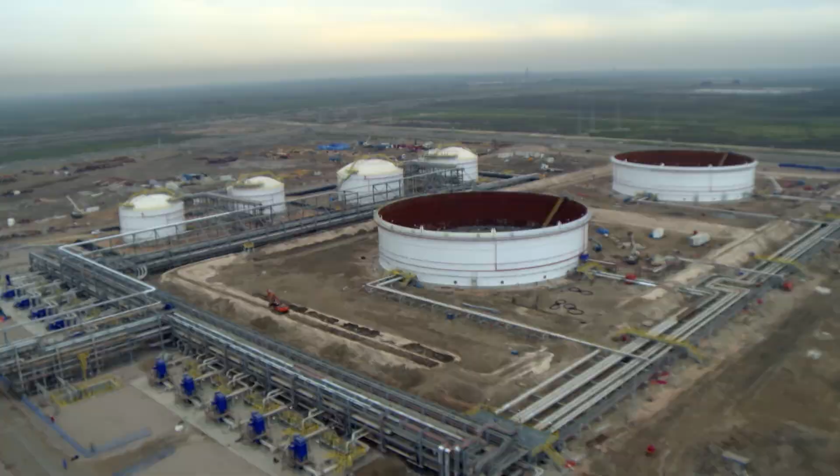Plan to start pumping oil at their mega field in Iraq in 16 weeks' time. An enormous amount still needs to be done. The export pipeline needs to cross the Euphrates.

This is absolutely not safe.

Enough wells need to be finished to produce 120,000 barrels per day. Every facility on the oil field needs to be tested, and oil needs to be brought onto the central processing facility for the first time.

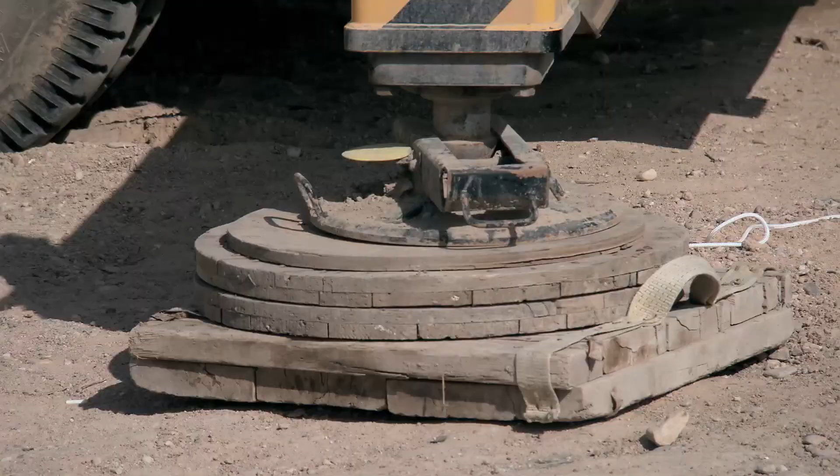But a perfect storm of strikes, religious upheaval, and engineering disasters threaten to derail the entire project.

Hidden deep below Iraq is one of the world's largest remaining onshore oil fields, West Qurna 2. One Russian oil man has dreamt about developing this field for 20 years.

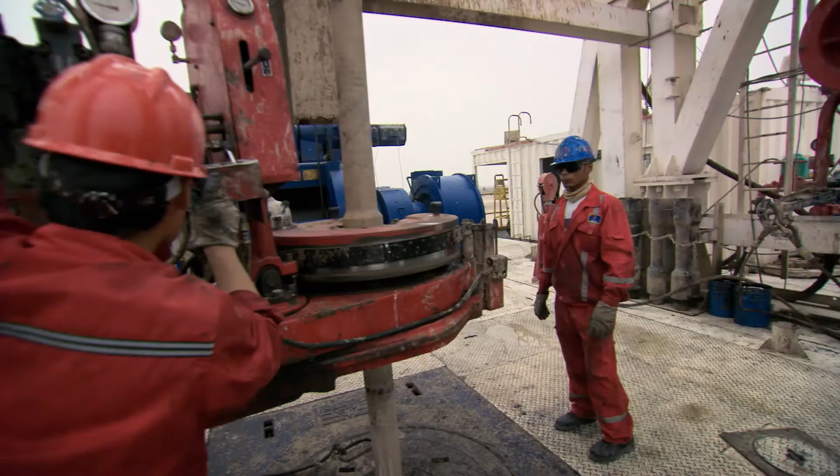Extracting this oil is the greatest challenge ever faced by oil field workers.

They battle extreme weather, searing heat, howling winds, and flash floods. They operate in a region where intimidation, violence, and terrorism are a constant threat.

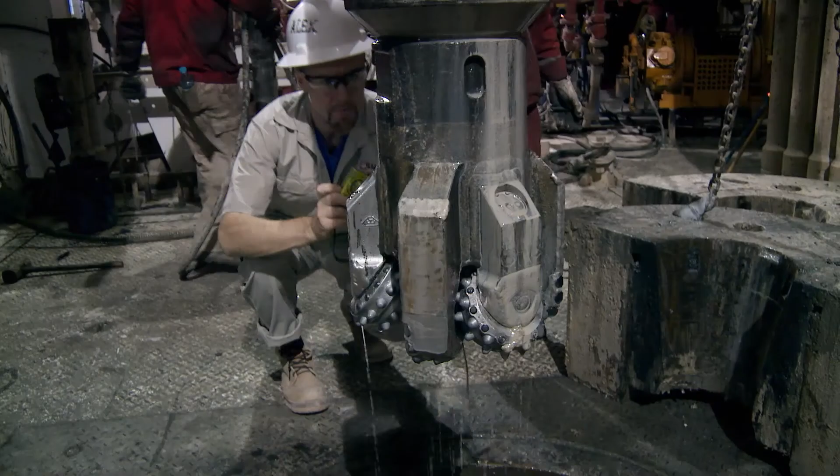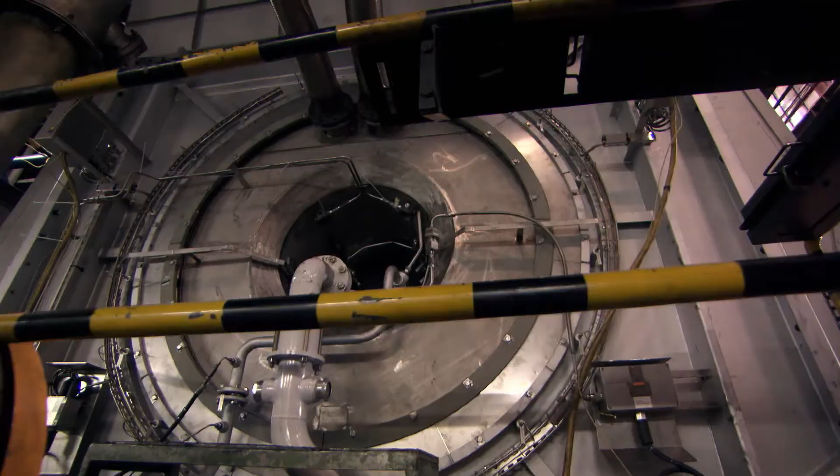But the greatest challenge of all is time. They have to lay hundreds of kilometers of pipelines, build a processing facility, tank farm and power station, and drill 23 wells, all within a construction window of 14 months.

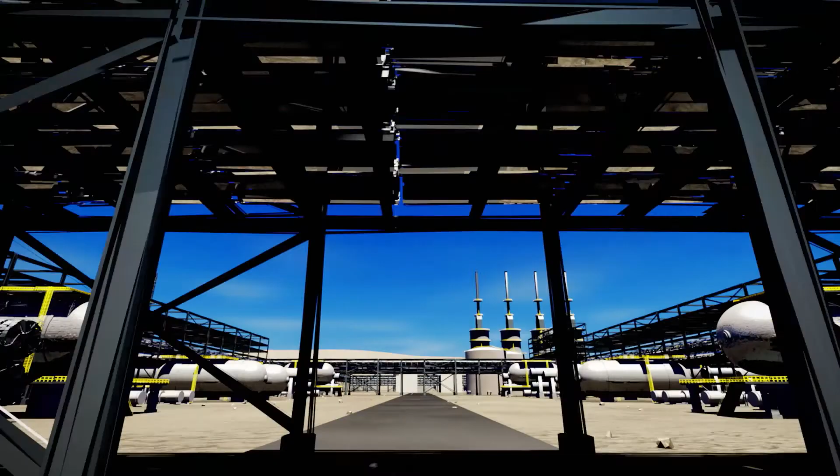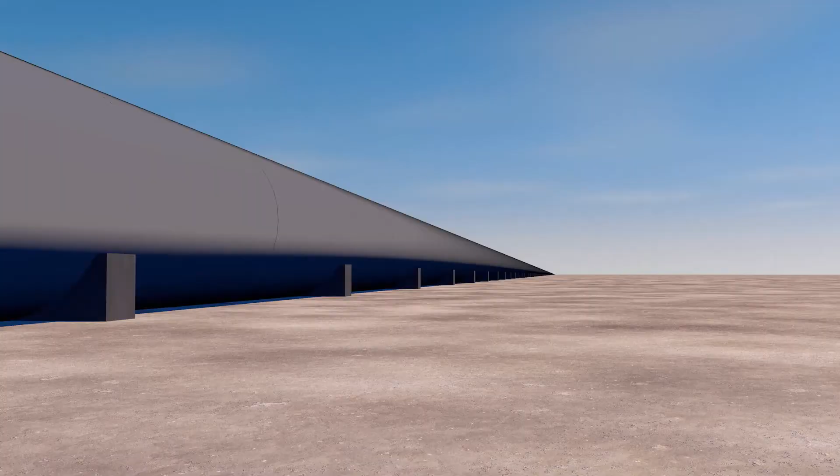By the end of March, Lukoil need to complete a central processing facility that will remove impurities from the oil, a gas turbine power plant to provide electricity for the entire project, a 103-kilometer-long export pipeline, a tank farm to hold the oil. Drilling clusters need to be built, 23 oil wells drilled, and infrastructure constructed to pump the oil to the central processing facility.

From November to January, Lukoil struggled to get their export pipeline under the 1.2-kilometer-wide Third River. However, while the pipeline team were busy completing the crossing, sectarian tensions across the region boiled over and threatened the entire project. It's the 4th of November 2013, and there's 145 days to first oil.

A nationwide religious festival marked by a day of fasting and pilgrimages to the holy city of Karbala are underway. Most of those people are coming from Basra, and they spent 3 days walking from Basra to here. Afterwards they will walk also at least 10 days to arrive to Karbala. It's about 560 kilometers.

This event is not affecting the oil operations. Those people are not harmful. They are very peaceful people.

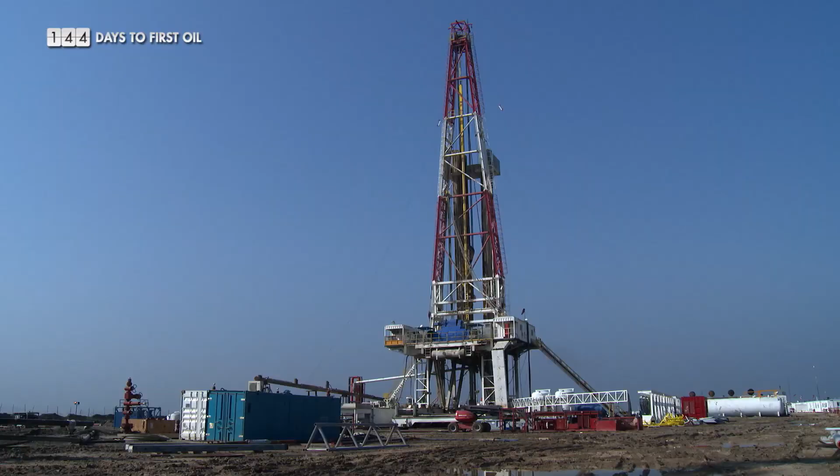Baker Hughes stunned Lukoil by deciding to pull out of Iraq completely. 600 employees of Baker Hughes and another US oil field service company called Schlumberger are moved out of the country. Drilling on oil fields across southern Iraq comes to an immediate halt.

The most important thing for our project is to keep this well safe. I mean safe for assets, for people, for environment, okay, and to be sure the well is controlled, all the well is controlled.

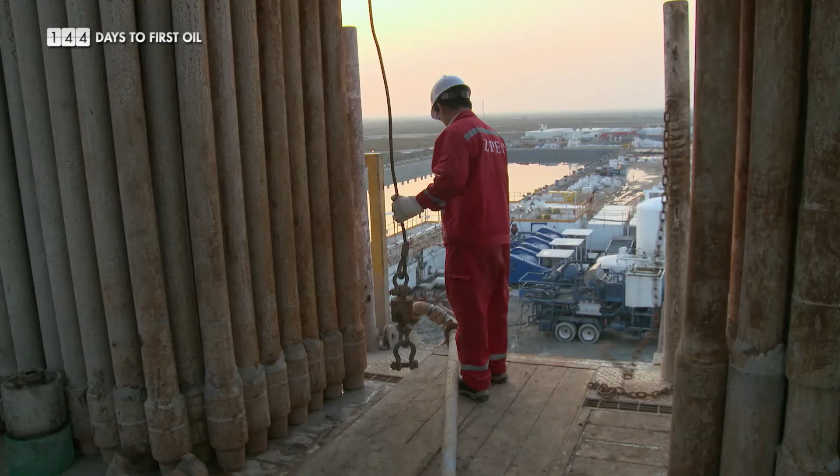If the solution is not found fast, this stoppage will prove disastrous. Lukoil won't have the 23 completed wells required for first oil.

It's 7 days since Baker Hughes left Iraq. The drilling clusters remain at a standstill. A delegation led by the Director General of the Southern Oil Company arrives at the pilot camp. Iskander Nazirov requests an increase in the number of troops protecting the oil field.

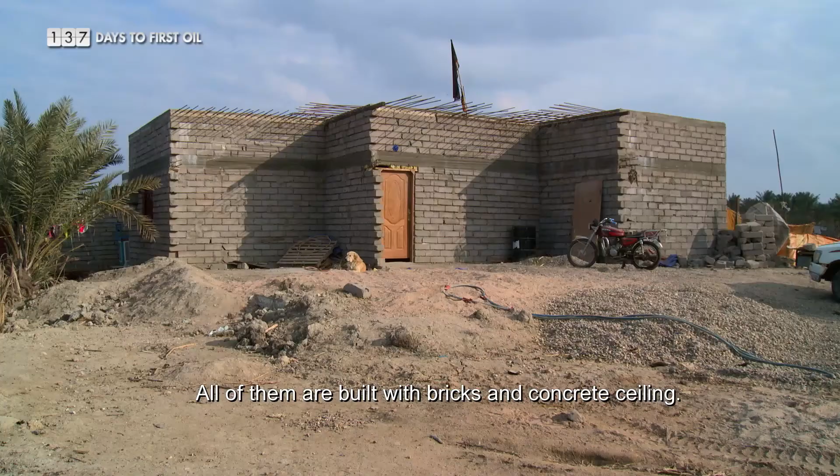When the oil companies want to use their land for oil activities, the Iraqi government paid them a lot of compensation.

Most of them, especially the young guys, are now working in the companies. Some of them work in the OPF as oil police in the company. Some of them work in security companies as security guards. Other people are working as normal workers. In fact, this area is giving them more sources to support their life.

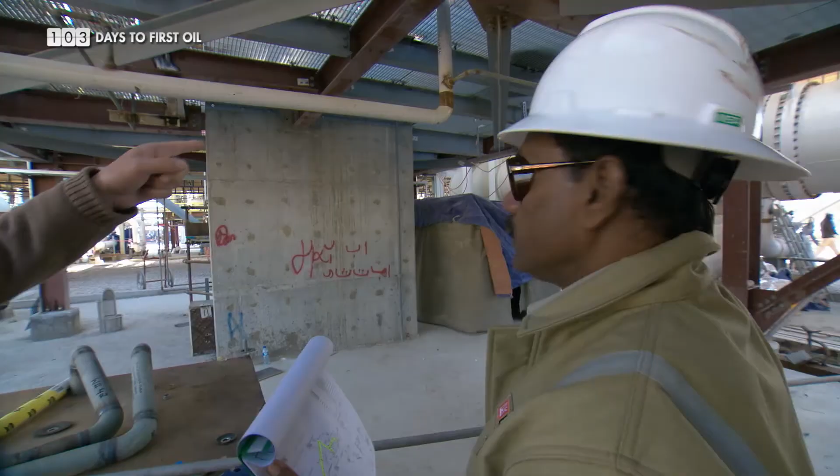All the pipework at the central processing facility required for first oil is now complete. Piping supervisor Gary Smith is here to carry out one final inspection. We're looking for any faults or anything that's not as per design or specification.

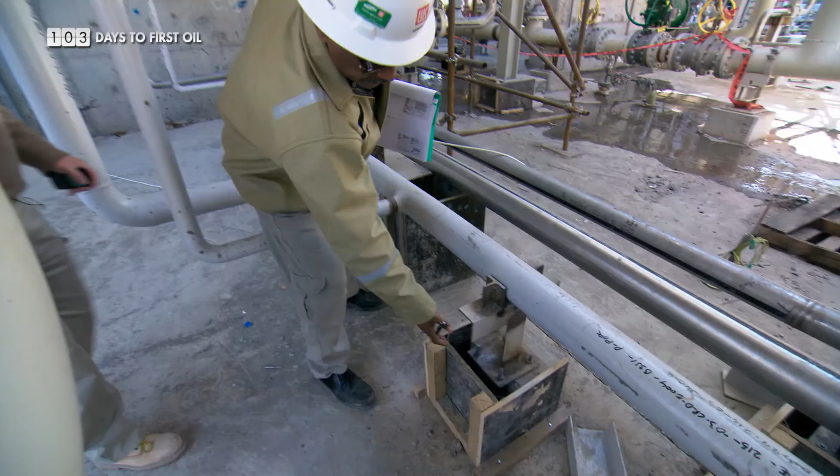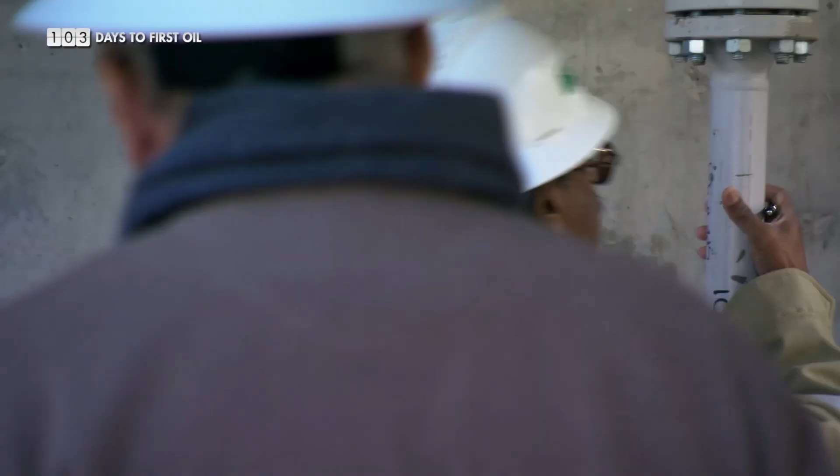Faults are marked down as either A or B, depending on their severity. If you have welded points that are not done, that becomes an A item, meaning this is on hold until the A item has actually been done. Fortunately, all the faults Gary has discovered are B classifications.

These can be rectified after the testing. The painting might not be up to standard. The support might need grouting or perhaps have the plinth finished off. But it's basically something that's not part of the integrity of the pipework. This is very good news.

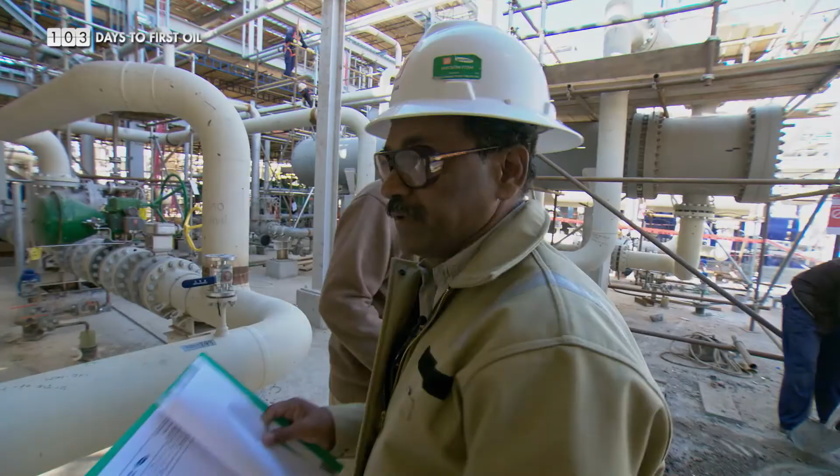The CPF is finally ready for pre-commissioning and commissioning, a period of intense testing of every facility on the oil field.

Now that the oil ministry has increased security for the oil field, Baker Hughes are back. For the past week, the drillers have been working at full capacity in order to catch up.

At Cluster 8, Mahmoud's crew are back on track. We finished all the wells, which were suspended for more than 2 weeks, successfully without any problems. And we continue our normal operation with Baker Hughes from that time up until now without any interruption.

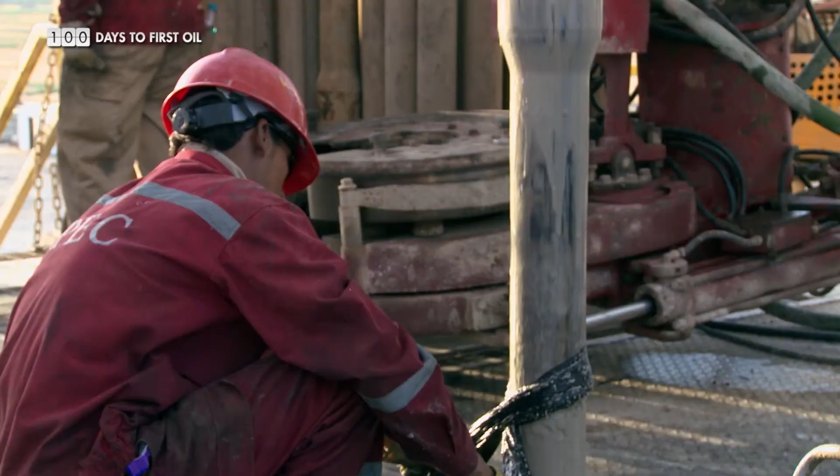23 oil wells were planned for first oil, but Baker Hughes' absence has had a profound impact. Now only 18 wells will be ready. No one will know whether 18 wells will be enough to supply the 120,000 barrels a day required for first oil until the oil begins to flow from the clusters to the central processing facility.

The drilling of a 1.5-kilometer borehole under the Euphrates River started in April 2013. It should have been completed by June 2013. It's now December, and once again the borehole has collapsed.

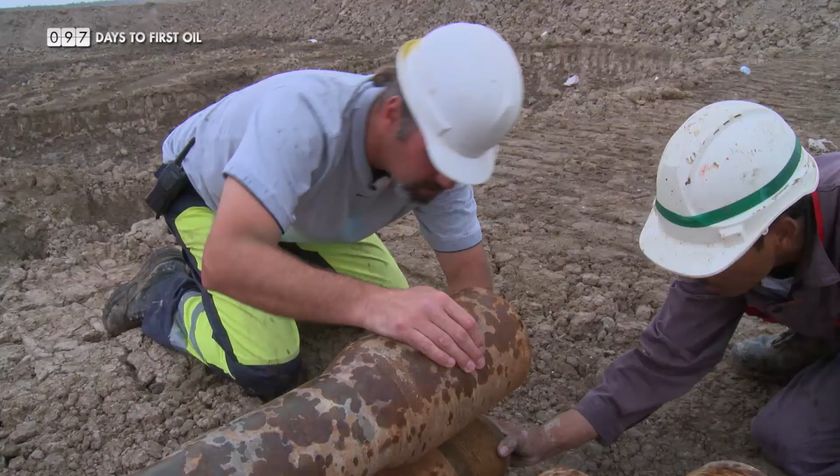The drillers suffered from appalling weather, rusty pipes, badly mixed mud, and faulty drilling rigs. In the driller's cabin, Supervisor Patrick Rogan is becoming increasingly frustrated.

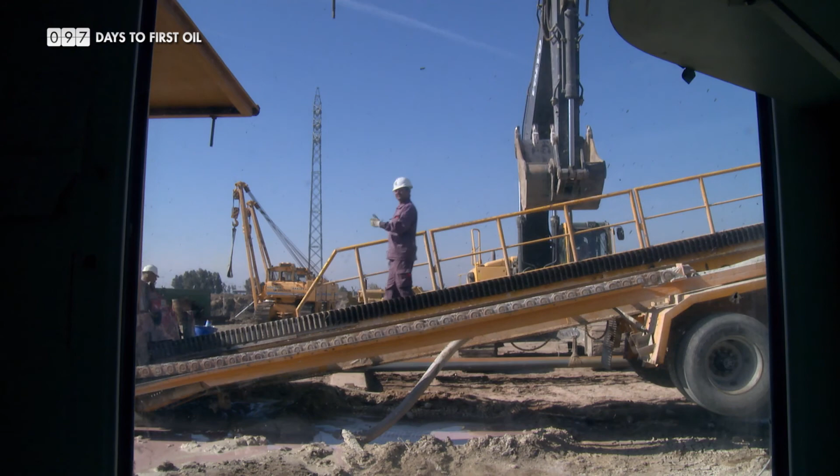There's been a lot of inexperienced guys on here. You try to explain, and explain, and explain, but nothing seems to sink in. This stop-start is really affecting the borehole. It's not doing us any favours whatsoever.

He reads the riot act to Techno's chief driller. If you want to pull that through, you've got to be in that seat at 6 o'clock in the morning, and drillers sitting there at 6 o'clock at night when that's still hot. No stopping. If they can go from A to B with no stoppages, working 12 hours a day, not stopping for stupid mistakes like running out of diesel, you'll have a chance of getting this pipe in.

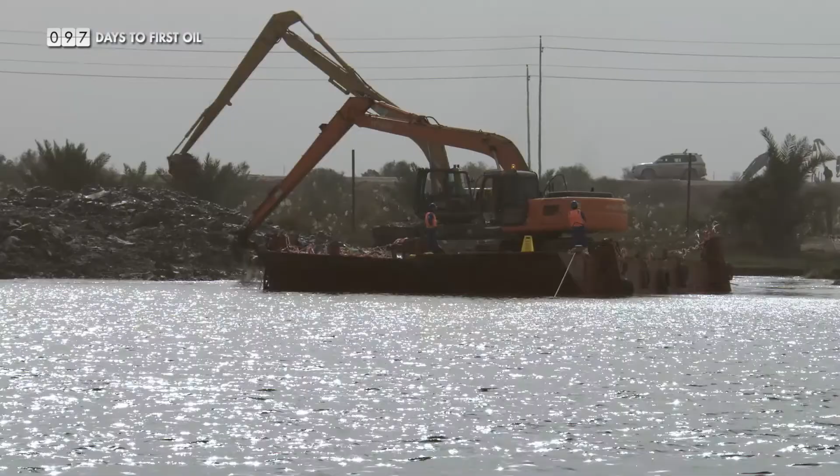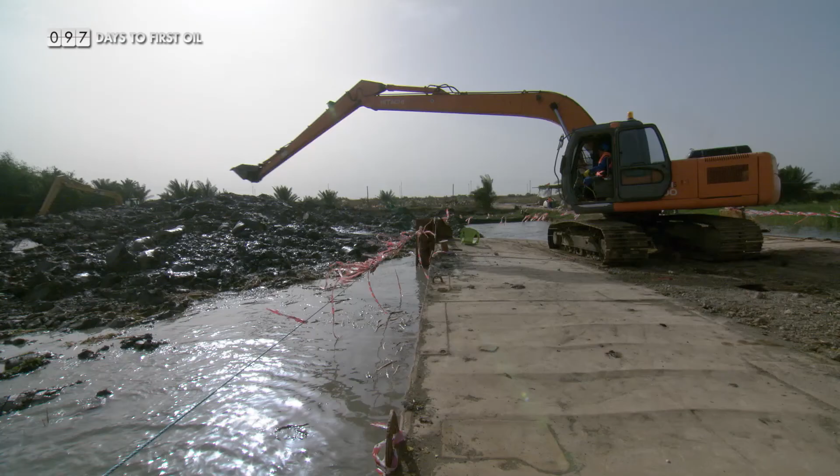One way or another, the guys have to get the pipe across the river in the next month if Lukoil are to have any chance of completing first oil by March the 29th. For the past few months, Lukoil's management have been preparing an alternative method of crossing the Euphrates, known as open cut. An Iraqi contractor has already dug a 4-meter deep trench along the riverbed. The open cut should be a simpler and quicker operation than drilling a borehole under the river. This operation might just allow Lukoil to complete the pipeline on schedule.

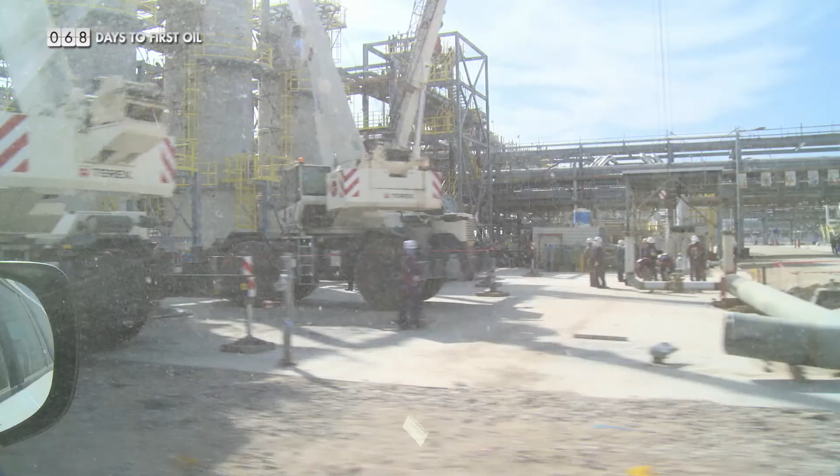At the central processing facility, the commissioning process is almost complete. Deputy Project Manager Vitaly Dyakov arrives to perform the final checks before the launch of the facility. New plant, new facilities, all people is new, and of course everybody is worried and a little bit nervous, but it is a normal process. If people don't worry about that, this could be dangerous.

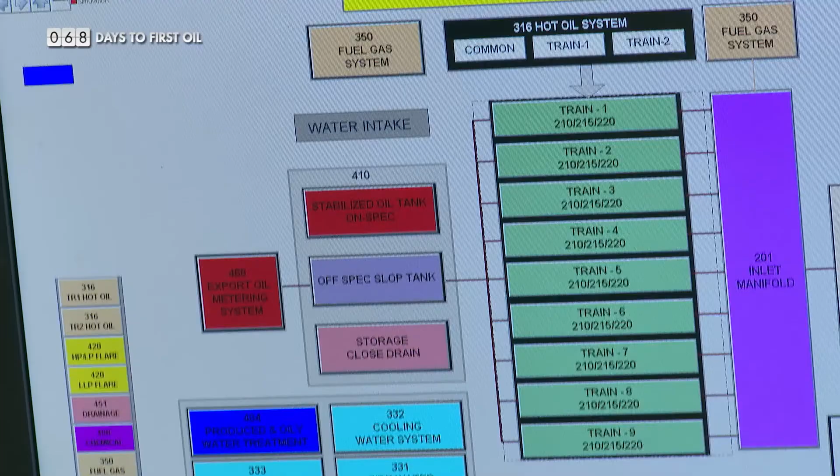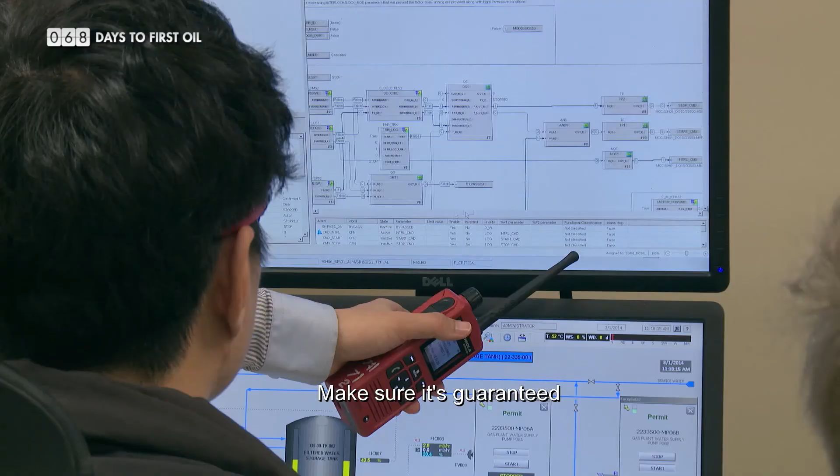First, he inspects the oil heaters and water treatment plant. Then he heads to the CPF's control room, the hub of the site, where all the processes to remove impurities from the oil are monitored. All is done, the cause and effect diagram, everything is checked. Train 1 is complete as well, yes? Yes. It's from here that the cleansed oil is dispatched from the CPF to the Tuba tank farm. Now we do a final test of the whole process without oil, to make sure and guarantee that during the startup all systems - gas detection, fire alarm, emergency shutdown - are working properly according to the approved design, and then we get oil.

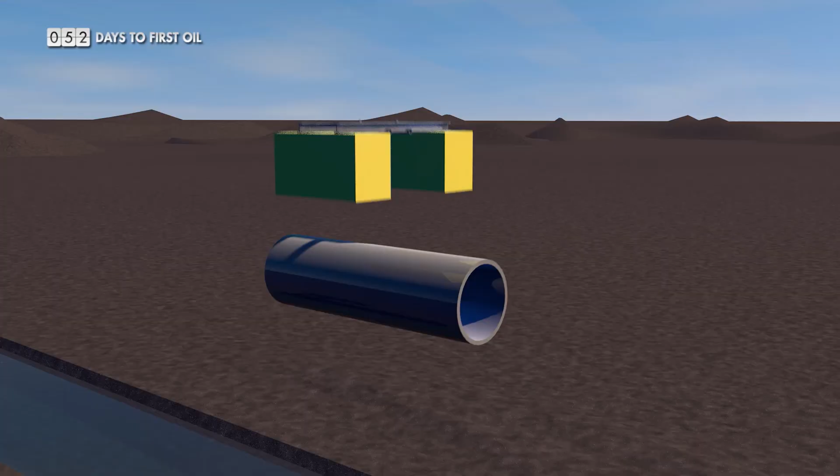The trench has been dug, the pipeline has been successfully welded together, and floats are now being attached along its length. This one section will complete the 103-kilometer export pipeline. The 500-ton pipeline will be lifted by cranes section by section. When it's safely floating in the trench, it will then be pulled across the river. Once in the correct position, the floats will be cut away and the pipeline will sink into the trench.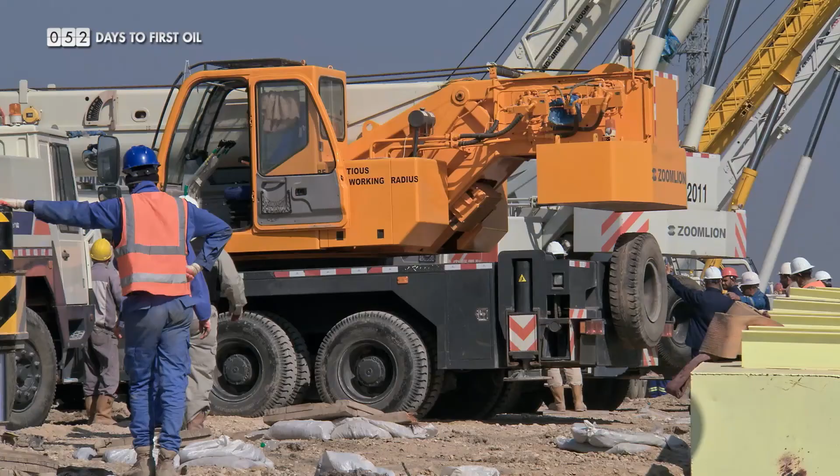The 9 50-ton cranes arrive that will lift the pipeline into the trench. The guys are worried. The pipeline itself weighs 500 tons, but it'll be filled with another 200 tons of water. Our concern is the soil itself - it's not that strong, it might not be strong enough. So we are worried now because after all that weight, some collapse might happen.

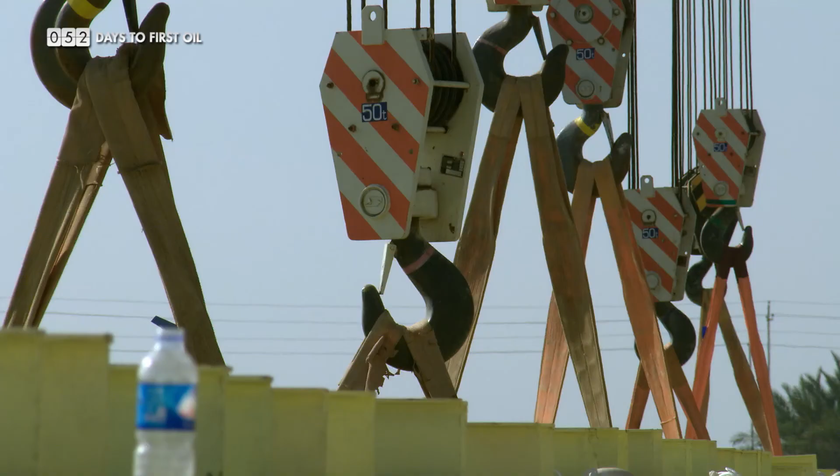The cranes are in position, but there's another problem. The company supplying the cranes has failed to provide an expert coordinator.

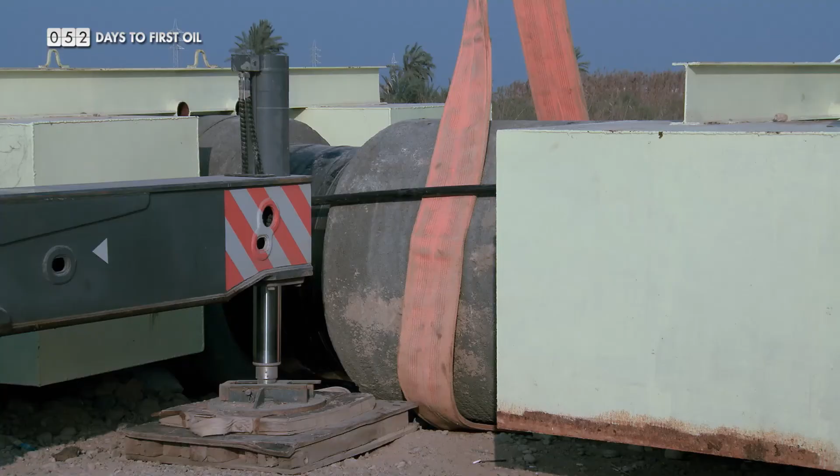Drilling supervisor Mahmoud Hussein is forced to step in and orchestrate the 9 cranes in maneuvering the 500-ton pipeline into the trench.

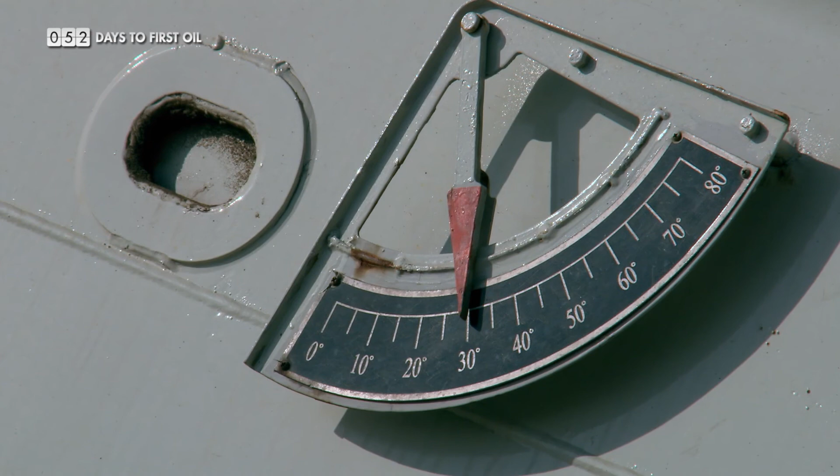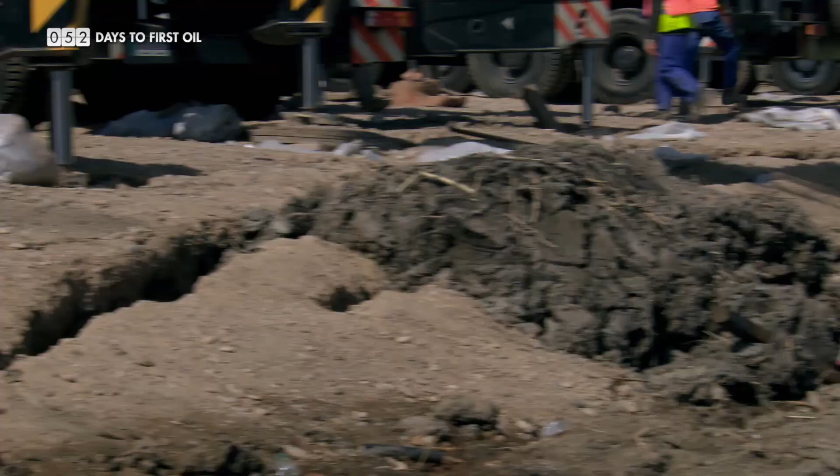The cranes strain under the enormous weight, and the pipeline is pushing against the riverbank, threatening its stability. The pipeline section hits the edge of the trench, creating huge cracks along the bank. This is incredibly dangerous - if the banks collapse now, the project will be put back by weeks. Workers rush to try to support the legs of the cranes as the rest of the team attempt to lift the pipeline up and away from the riverbank.

If he will lift just like this, it will go. What can I do? The weight is here now. If he will lift it like this, it will go.

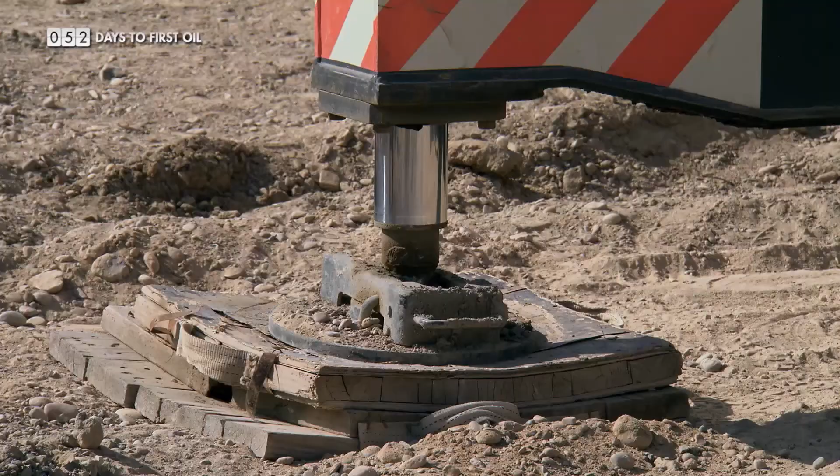Hussein must guide the pipeline into the trench before the banks collapse completely.

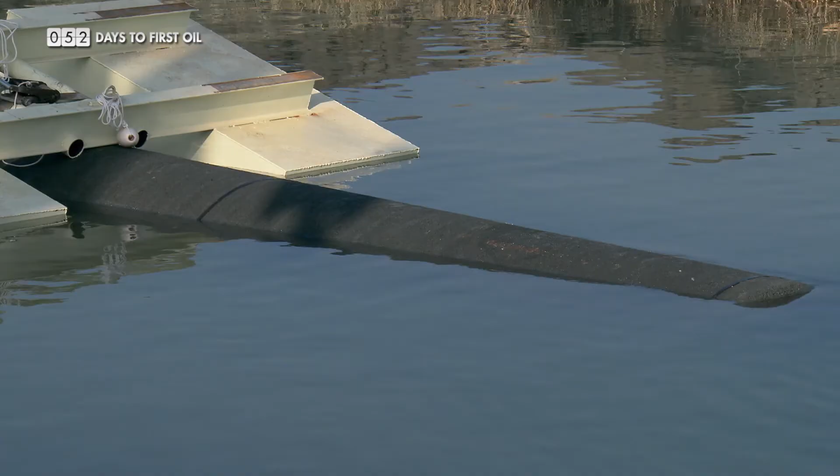The first section of the pipeline is safely in the water, but there's yet another problem. The floats have started to come away from the pipeline. If too many detach themselves, the pipeline will sink.

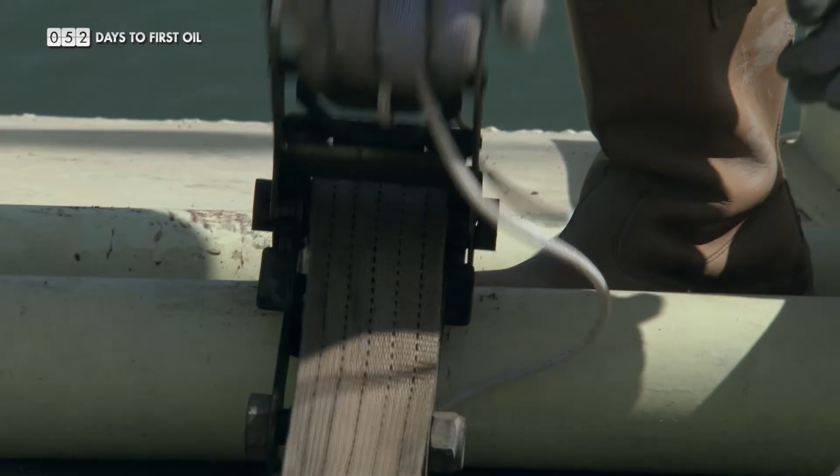As the sun sets on the Euphrates, the team know that tomorrow will be the make or break day for the entire pipeline project. Progress is not good for today. It's already almost evening here, and we get about 20-25%. It's too slow. This is the huge problem for our progress for all the project. All the oil field is here now.

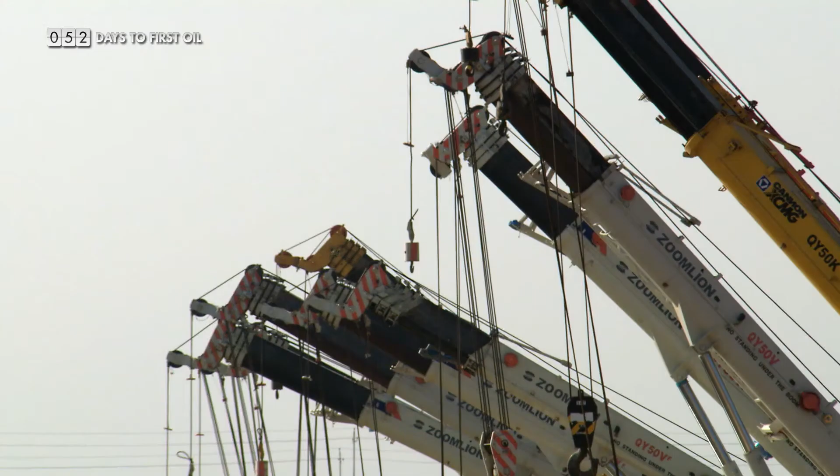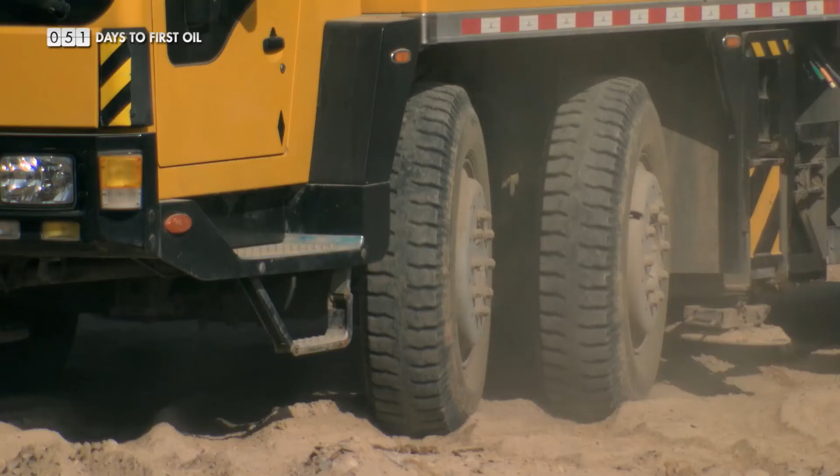It's early morning at the riverbank. If Lukoil are to make their March 29th deadline for first oil, this pipeline must cross the river in the next 48 hours. All the floats have now been reattached, and a new monster crane has been brought to the site. The lifting capability is much better, so hopefully it will take the main load and we will move better.

Only 25% of the pipeline is in the water. The rest of the pipeline now needs to be lifted into the trench over the dangerously destabilized riverbank. With Hussein again coordinating the cranes, the middle sections are successfully lowered into the trench.

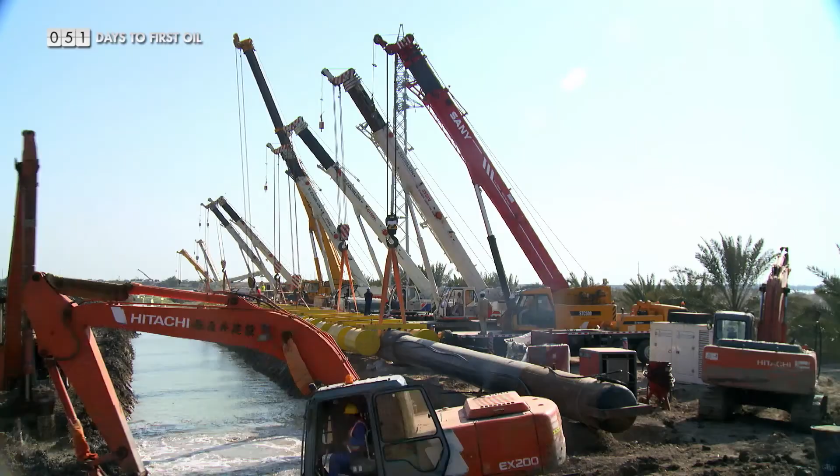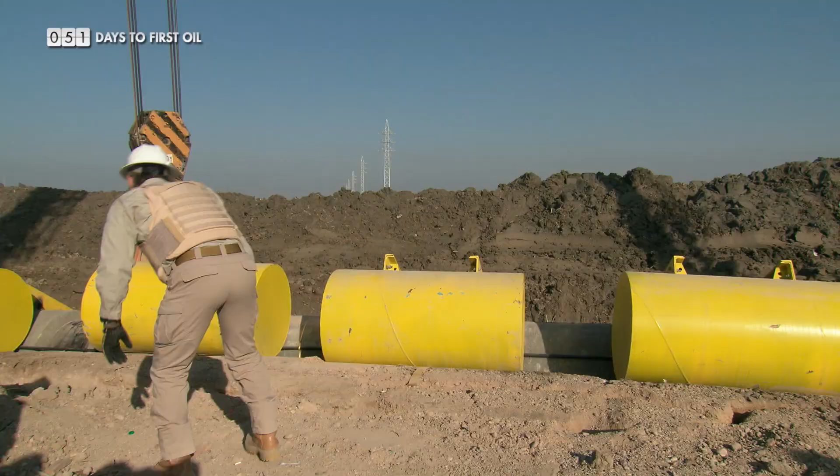The cranes move along the riverbank and begin to lift the final section of pipeline. The pipeline starts to slip down the edge of the trench. Hussein manages to navigate the pipeline over the bank and into the trench.

We were struggling for 2 days to lay down the pipe in the trench, and you saw a lot of safety concerns. So thank God, it's been done properly.

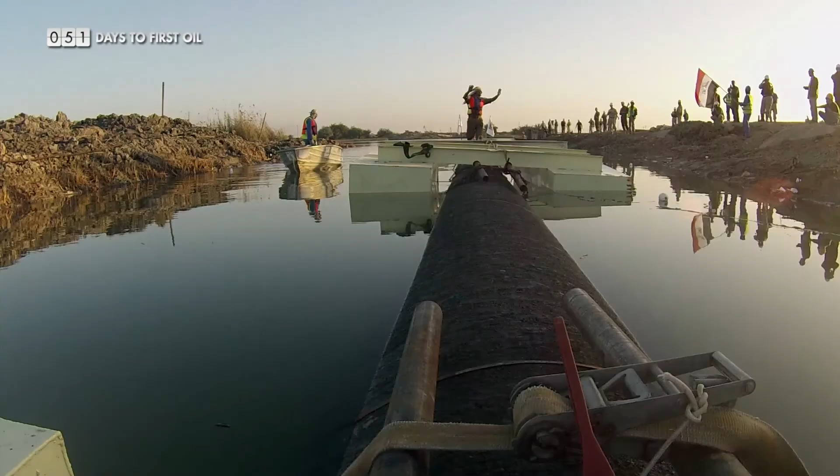An hour later, the crossing is complete. Finally, the export pipeline has successfully crossed both the Third River and the Euphrates. Thank you, thank you. I'm happy, very happy. Very good, very good.

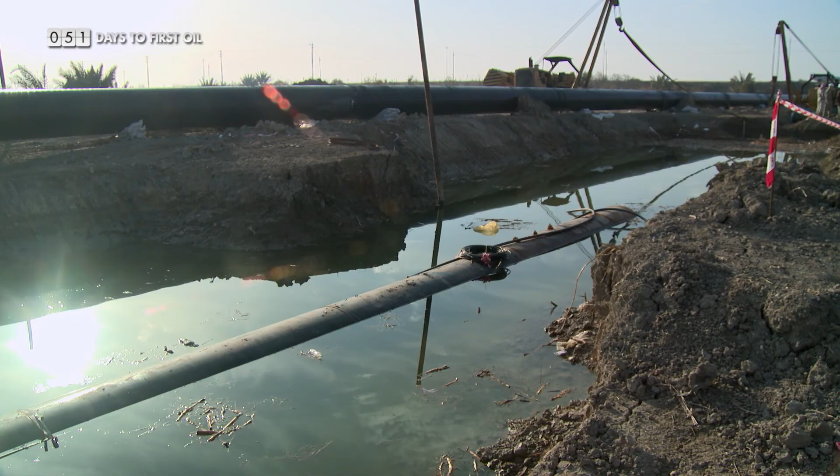The 500-ton pipeline has been pulled across the river. Today, it's being centered exactly above the trench. As soon as the surveyors are happy the pipe is in the right place, the floats are removed.

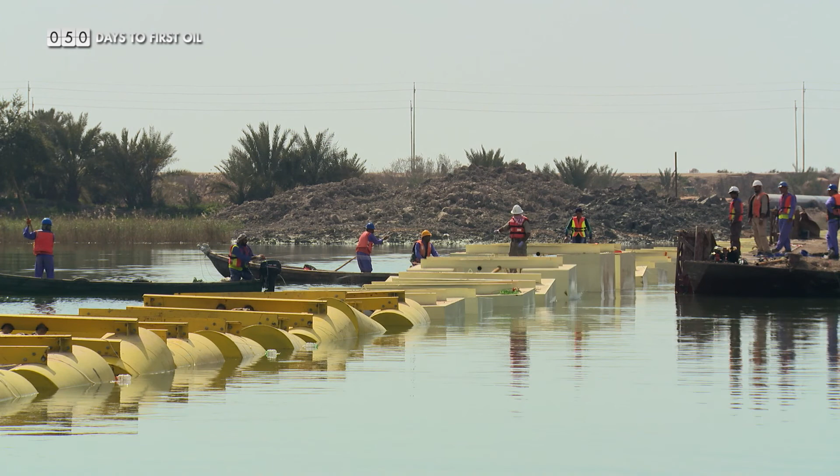But there's a problem. The pipe is sinking. The guys need to remove the floats as quickly as possible so that the pipeline doesn't sink with them still attached. Some of them are still connected there and it goes down. So it means you have to dive there and try to cut these belts under the water. And this is absolutely not safe.

Despite their best efforts, a large section of the pipeline sinks into the trench with a number of floats still attached. Now it's a race against time. A diver is deployed to cut away the floats. Not only does he have to contend with the strong current, but these heavy metal floats burst out of the river at high velocity.

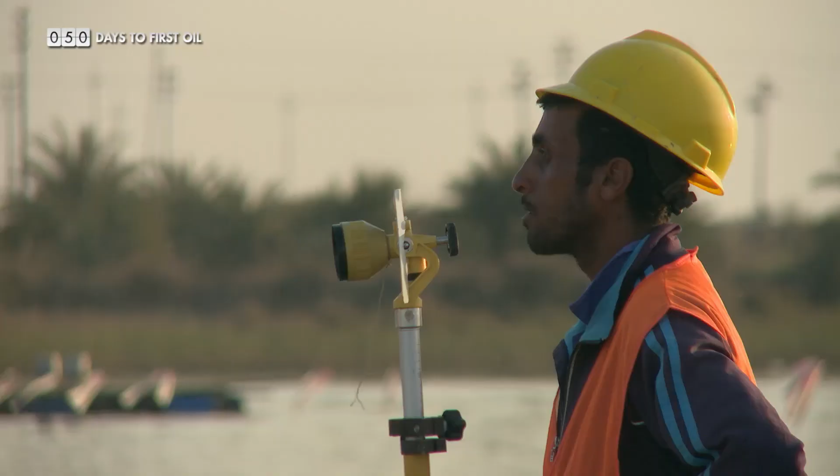If one of them hits him, he'll be in grave danger. He manages to cut them all free. The pipeline finally sinks into the trench on the riverbed.

After 4 tense days, this section can finally be connected to the rest of the pipeline. This is a fantastic moment for the entire project. The 103-kilometer export pipeline connecting the central processing facility to the tank farm is finally complete.

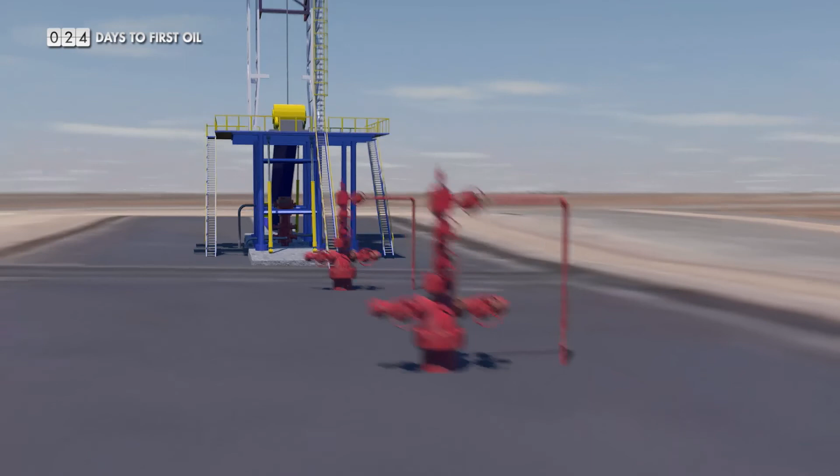This is a momentous day at Cluster 6. The first 4 wells will be opened. Oil will then flow along the 7-kilometer pipeline into the CPF. This will be the first time oil enters the plant.

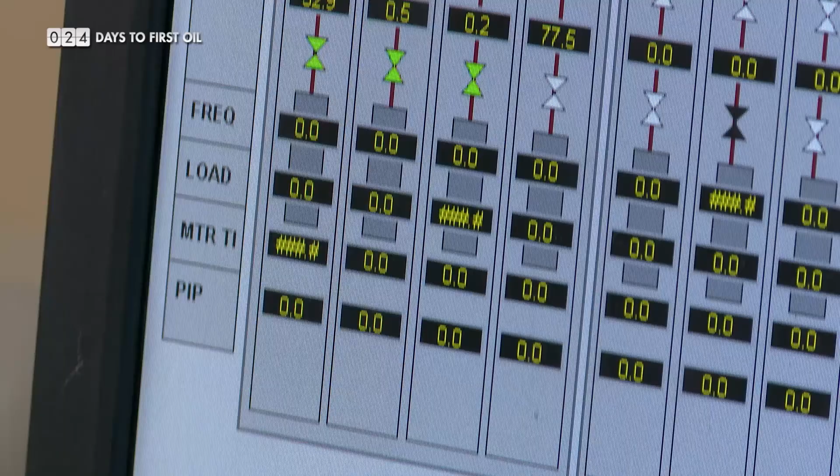At the CPF, the area where oil will arrive has been evacuated of all personnel. In the control room, last-minute checks are being made to ensure the safe transit of the oil into the CPF storage tanks. Sergei Nikiforov is personally overseeing the launch.

Samsung team ready. Yes. Open well. Yes. My congratulations. So, let's go.

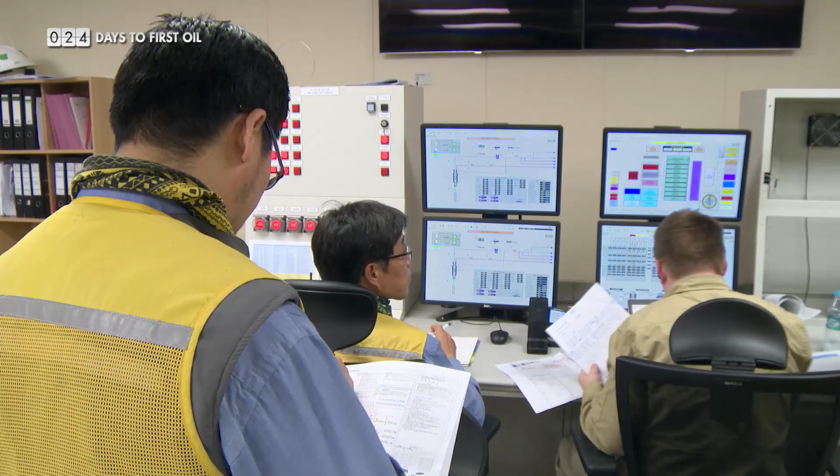The pressure at which the oil enters the main pipe needs to be carefully regulated by the team in the control room.

If the pressure is too high, it will rupture the pipework, and highly flammable and toxic oil will flow over the facility. This would be disastrous.

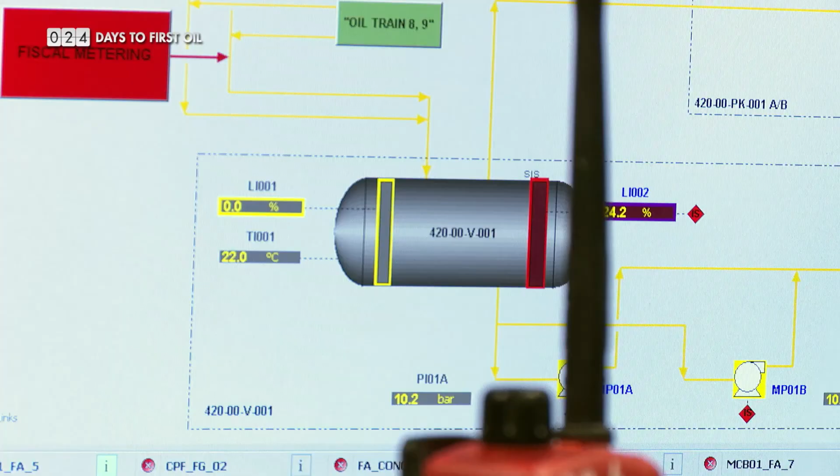With the oil now flowing towards the CPF, the team race to open the last 2 wells.

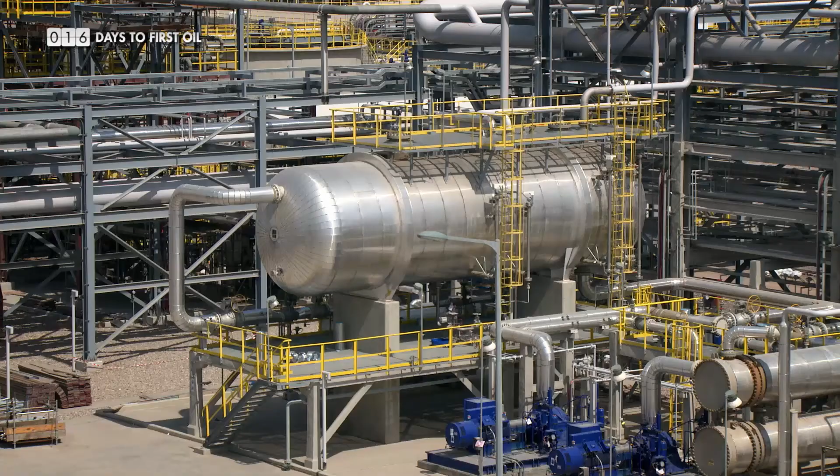It's been 8 days since crude oil first arrived at the CPF. Here, the oil is treated, and water, sand, and gas is removed. The oil is then stored in tanks. Now, these tanks are full.

Well, today would be a significant day for our project for the reason that we're reaching the limit of our storage capacity, and we're about to start transferring oil into the export pipeline.

The oil now needs to make its way along the 103-kilometer pipeline to reach the Tuba tank farm. For this first journey, a pipe integrity gauge, known as a PIG, precedes the oil, clearing all debris from the pipeline.

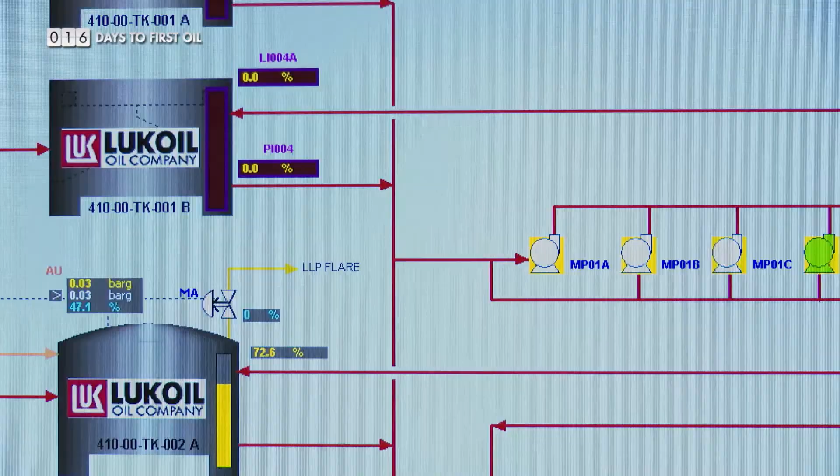The team at the CPF must ensure that the oil is leaving the facility at the correct pressure to prevent the pipes rupturing.

Check, double check, triple check. Very important moment.

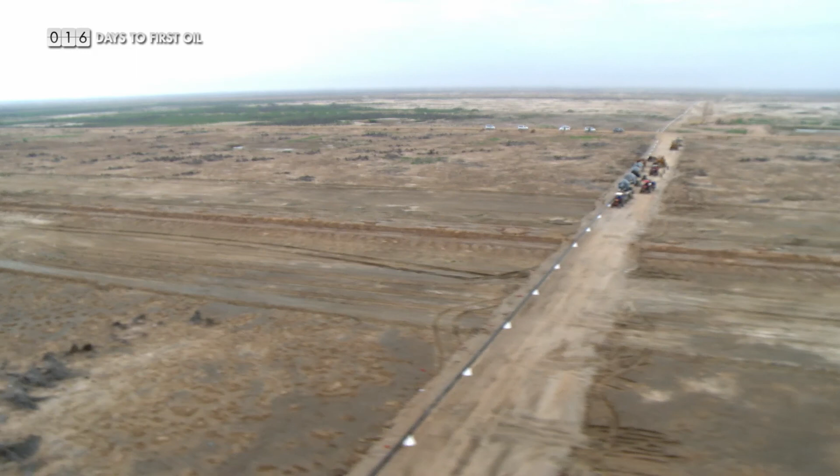Andrei Kuzyaev has arrived to celebrate this momentous achievement in true oilman style.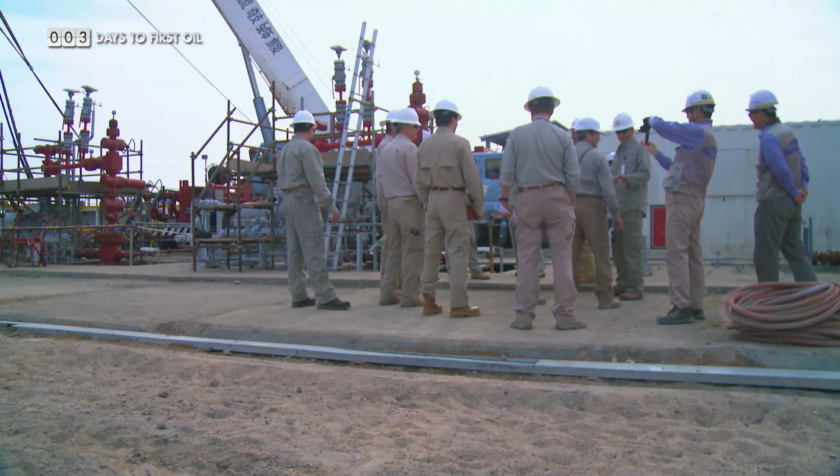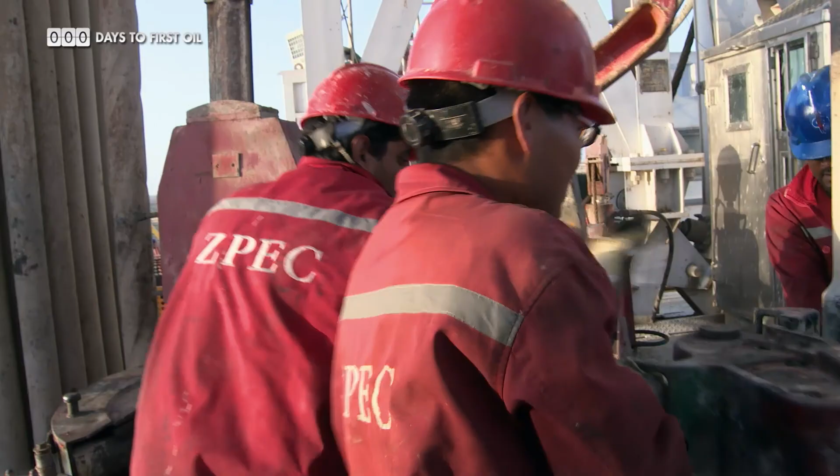It's first oil. Against all odds, Lukoil have done it. A report by oil field specialists IPA rates this achievement in the top 10% of engineering projects in the world.

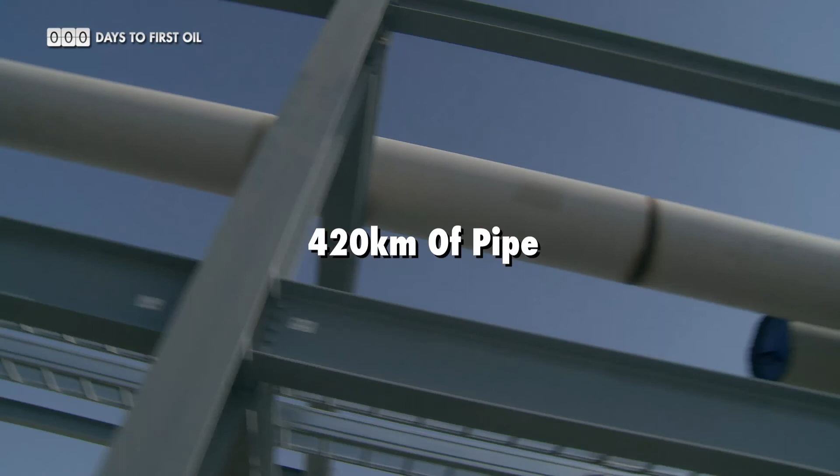A mere 18 months ago, in September 2012, construction began of the central processing facility with the insertion of 13,000 piles into the empty ground. Since then, 48 pipe racks have been built, 420 kilometers of pipe inserted, and 600,000 meters of cable installed to allow the CPF to process 120,000 barrels of oil a day.

In the same time, 46 wells have been drilled, a water treatment facility constructed, a power plant has been built, and a 103-kilometer pipeline consisting of 9,000 welds crossing 2 major waterways has been laid, connecting the CPF to the tank farm.

Today, VIPs from Russia and Iraq are coming to West Qurna 2 to celebrate reaching first oil. At 11:30 precisely, the helicopters delivering the VIPs set down in the middle of the CPF.

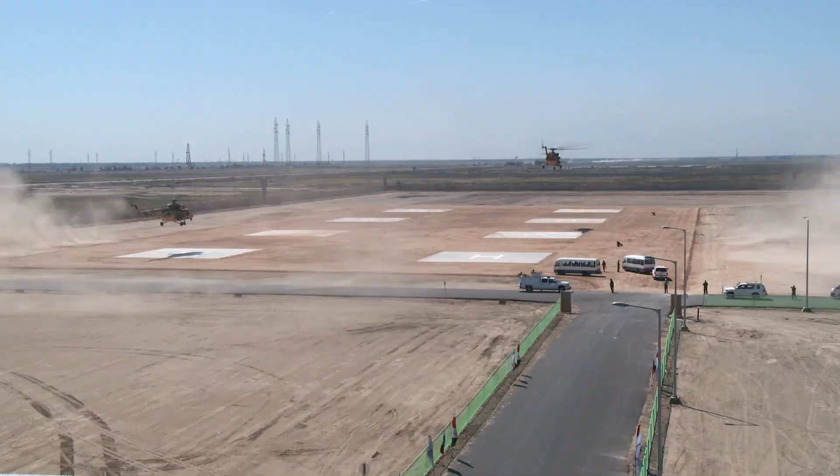The Minister of Oil is taken to the control room at the heart of the central processing facility.

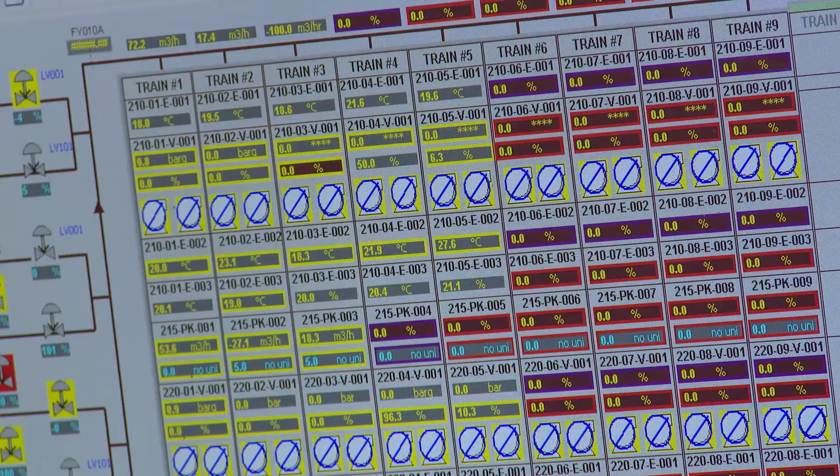Dr. Shahristani, Iraq's Deputy Prime Minister, leads the delegation of VIPs. The celebrations can begin.